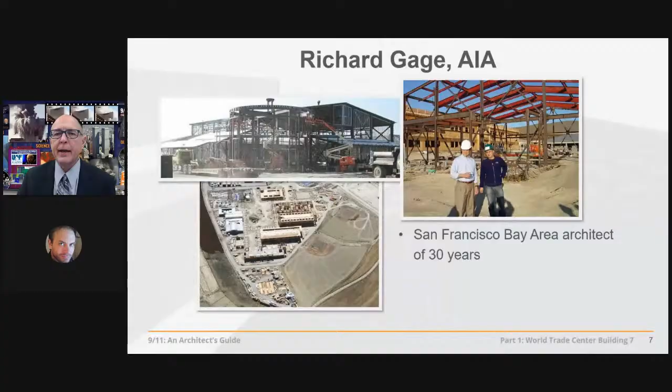Thanks, Andy. Just so people know something about my background, I was responsible at a local firm here in the San Francisco Bay Area for the construction documents for these $3 and $10 million gymnasiums, and the construction administration for this $125 million high school. And more recently, before launching full-time onto this important outreach effort, I had similar responsibilities working on this $400 million mixed-use project in Las Vegas with 6 blocks of retail, mid-rise office space, and parking structure, altogether about 1,200 tons of fireproof steel framing. I now work full-time educating architects, engineers, and others to understand what really happened at the World Trade Center using the material in these courses.

So let's get into it. Maybe some of you didn't even know that there was a third tower that collapsed on 9/11. When we travel all around the country, talking to architects and engineers at conferences, we find that more than half of them are completely unfamiliar with the third worst structural failure in modern history, Building 7.

After the Twin Towers, the worst failure here is this 47-story skyscraper that's the tallest building in most of our states, actually, but it looks dwarfed here next to the tallest buildings in the world at the time they were finished. It's part of the World Trade Center complex, Building 7, built in the 80s by Larry Silverstein, whom we'll talk about a little more later. The architect was Emery Roth and Sons, structural engineer Irwin Cantor.

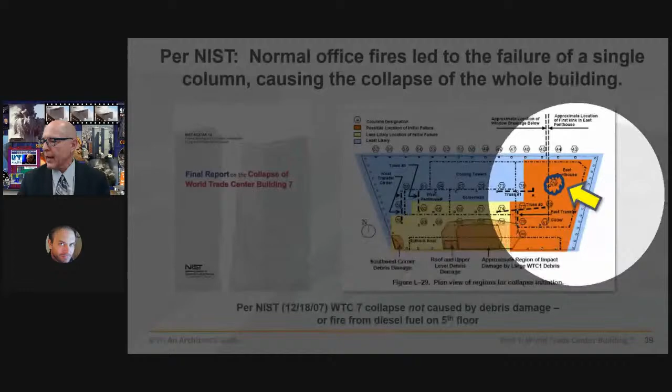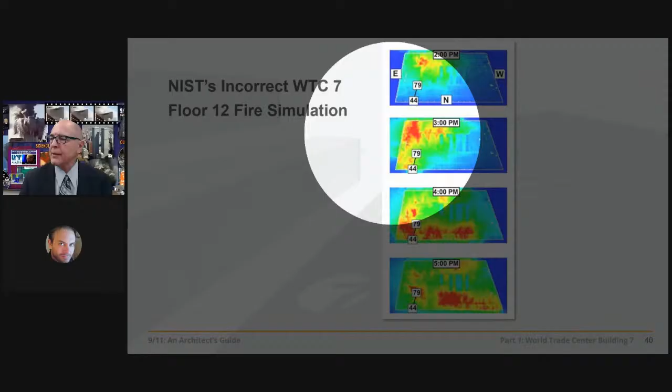NIST says the fires were concentrated at the time of collapse around column 79 under the east penthouse, because it did collapse first. So they focused their initiation of collapse theory on this column and the fires around it, with arguments claiming the fire started on the south side, which is where the North Tower was, and some of the debris hit it.

Those fires are hovering around column 79 for more than an hour until the time of collapse, that's what they're claiming. Yet they contradict themselves, because earlier in their report they say such fires did not persist in any one location for more than about 20 or 30 minutes. Indeed, that's what fire protection engineers tell us—that's all the fuel there is to burn in a modern skyscraper.

More consistent with the actual photographs, the fire has moved from the east side on the left over to the west side on the right, on the 12th and 13th floors, the floors of particular interest for the initiation of collapse by NIST.

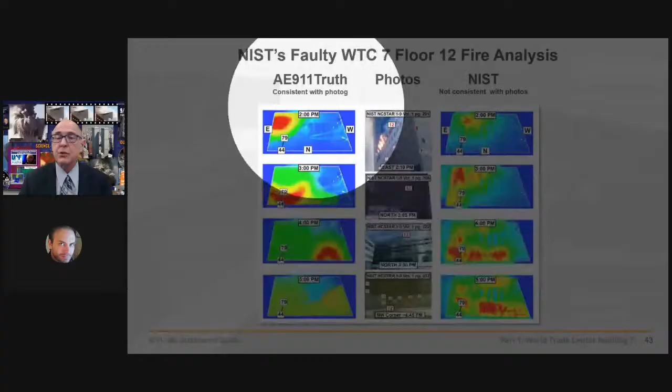So we've done our own fire progression, which does start on the south side and moves through the area, according to the photographs. That's consistent. But then by about 4 o'clock, those fires are well past column 79, more than an hour and a half before the collapse. Those fires are not around column 79 as NIST claims.

So you begin to see the problem here. NIST is exaggerating the fires for a specific intent.

Let's go further into Shyam Sunder here: our study has identified thermal expansion as a new phenomenon that can cause the collapse of a structure. For the first time, we have shown that fire can induce a progressive collapse.

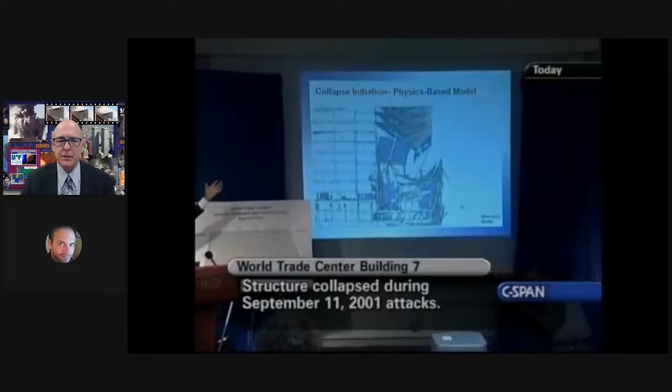So let's move on. You can see on the screen, the column at the very right is column 79, and that's the column that first buckles, causing the floors to come down, followed by a quick succession of failures of adjoining columns. So there's a very specific set of features associated with the initiation of collapse theory that NIST is putting forth, and we're going to look at those very carefully right now.

We have, first of all, long span beams over this area that they say the fire was heating up during the hour and a half prior to its collapse. We saw that was not true also.

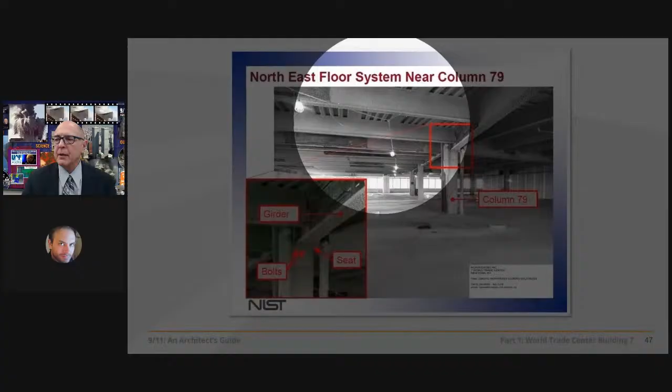But we can also see, halfway during construction, that these beams are fireproofed—that's what's going on in this area right now during construction. That provides 2 hours of fire protection on those beams. So any fire that lasted 20 or 30 minutes could not have expanded those beams through thermal expansion, the main theory that NIST put forth.

So they claim it anyway, and they suggest that the shear studs were broken. Those shear studs tie the beam to the slab up above, and they say those were broken as the beams expanded.

Well, they didn't put any of the heat into the concrete slab—they put it all into the beams in a second and a half in their computer model, forcing them to expand and then break the shear studs. But that couldn't have happened, because as we'll see, other studies show that couldn't happen at all. If you have a fire, it's not going to put all the heat into the beam in a second and a half—it's going to take time, at least 20 minutes.

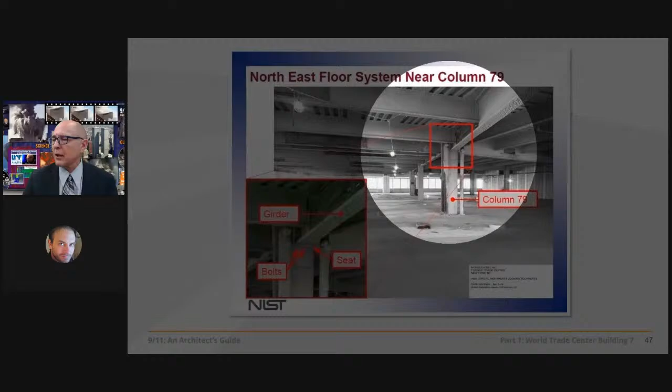So if the beam is not fireproofed—which it was—we go on and find that this girder, which is supporting these beams, was said by NIST to have been pushed off of its seat on this column.

And that's what caused floor 13 to fall on 12. Now, this girder also has shear studs. NIST says, oh no, that girder didn't have shear studs, but the shop drawings show that there's 30 shear studs on that girder. So this is extremely important. It's yet another serious omission of NIST.

They're saying, and you always put shear studs on girders if you're going to put them on beams anyway. That's what structural engineers do. But they say, oh, they weren't there.

Well, okay, let's say all this could have happened and this girder got pushed off to the right, off of this seat on this column 79. Well, that girder would have had to have been pushed 12 inches off of its seat because that's how long the seat is. But NIST says, oh no, it only had to be pushed halfway off of its seat. And then the flange, this bottom part of the I-beam, if you will, simply folded.

Well, okay. But that couldn't have happened because there's a stiffener, which you can see in the photograph here. And you can see on the shop drawings, highlighted in red, that would have kept that flange from folding. So they conveniently omit the stiffener too, to allow their hypotheses to spawn freely and suggest that the girder only had to be pushed halfway off of its seat.

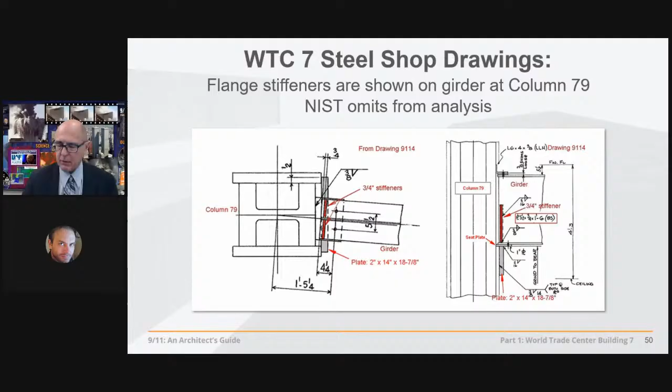Well, there's another problem here. Let's say that girder could have been pushed all the way off of its seat, as NIST claims. Then they say the 13th floor would have fallen on the 12th, and the 12th on the 11th, and the 11th on the 10th, and so on for 9 floors, until this column 79 is completely unbraced for 9 floors, at which time it then buckles because it's not braced laterally. And so that's NIST's theory, but that couldn't have happened either.

Why? Well, it's been shown that it would have, let's go back. And it's been shown by Tony Szamboti and others that it would have required 632,000 pounds of dynamic force from this floor at the point of connection at the girder to break the connections from the girders to the columns on the floor below, floor 12. But we only have 60,000 pounds, 10 times less than required to break that connection. But these values are manipulated also by NIST.

So that's the theory. And then what happens? This floor, there's a complete cascading effect, an implosion, if you will, inside the building without any telegraphing by deformation of the exterior structural steel perimeter of this form. So you would have seen massive buckling of that steel, which would have caused incredible breakage of hundreds and hundreds of stone panels on the outside, the cladding, and the windows. It would have been an incredible breaking up of the exterior because the beams on the inside of the building are very carefully welded to the beams and columns on the outside of the building.

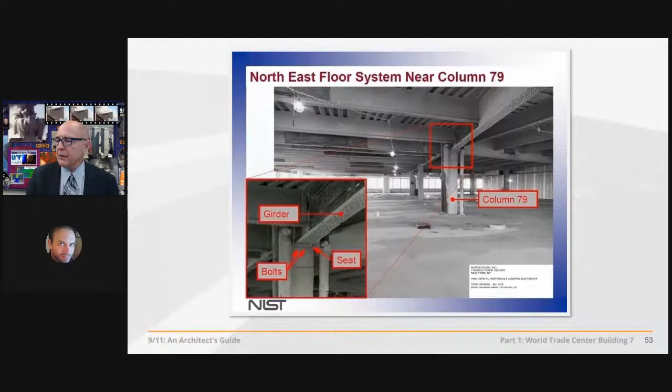Just the columns, not the beams. So none of that could have happened. So what they're going to show you here in their computer model is that the interior gave up first and then the exterior gave up, and they only have the east side of this building to show here.

Let's take a look. Here's our structural model showing the building collapsing, which matches quite well with the video of the event.

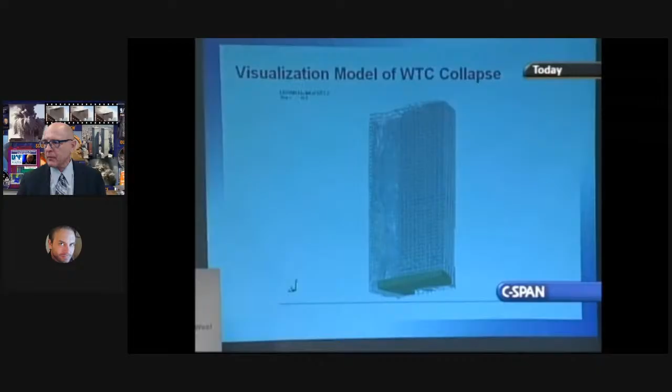What we see is something else, which we'll get to. We have the complete buckling now in their computer model afterward, but none of that is shown on the video. And it begins to tip over. So they stop it after just 2 seconds, because I guess they don't want us to see how it's tipping over. I mean, they had 7 years to come up with this theory and produce their final report. They took 7 years.

So this is why we submitted a Freedom of Information Act request to NIST. They write back saying, well, we deny, we're not going to release that computer data to you. It might jeopardize public safety. Wait a minute. Doesn't it jeopardize public safety to withhold this information from the architects and engineers who are tasked with ensuring the public safety? After all, isn't there hundreds of similarly designed buildings out there with long span beams that might expand due to normal office fires?

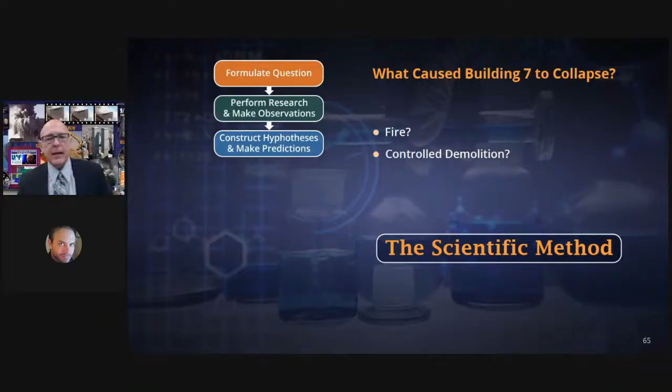So we test with experiments those hypotheses. We analyze the results, we draw conclusions. If the hypothesis is corroborated, we report the results in an open, transparent manner.

We don't hide the computer input data and refuse to give it to the architects and engineers who are tasked with ensuring public safety, right? We want all to build on the body of work that we do. That's the core, the effect of the scientific method. We rely, we have faith in the work done by others because it was done openly, transparently.

If the hypothesis is not corroborated, what do we do? We go back, try again. We construct a new hypothesis, which is what we're doing today. And we continue until we have a hypothesis that is corroborated by the research.

So let's do some background research. How are buildings destroyed? Fire is certainly a destructive force, but never have we lost a skyscraper to it. In a wood frame building it's a chaotic, natural, organic event. The building wouldn't fall straight down through the path of greatest resistance, the tons of unburnt structure below. It might fall over if it collapses at all.

NIST acknowledges that we only have fires burning for 20 or 30 minutes or so. That's all the fuel there is to burn in modern skyscrapers, desks and chairs and so forth. That's why we build our high rises out of non-combustible materials and fireproof them with 2 to 3 hours of fire protection.

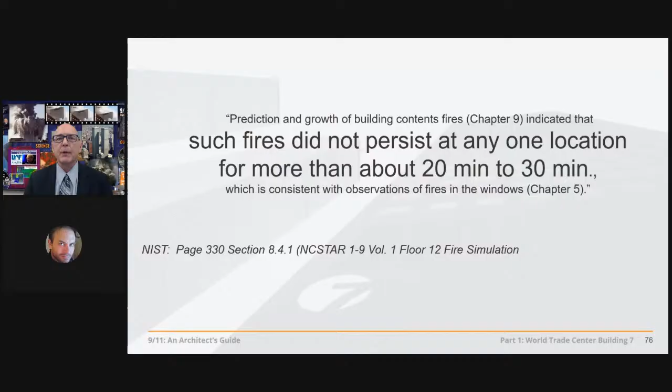So let's look and see how we might expect a high-rise to behave in a fire. Like this example, a key, critical example, the largest test of its kind: 8 stories built out of steel. Some of it is fireproofed, and some of it is not. They wanted to know what happens if they reach a 2,000-degree fire with an incredible amount of fuel, then set it on fire and see what happens. Let's take a look.

This was the largest test of its kind ever conducted. It showed how unprotected steel can be distorted even by a normal office fire. But as is typical in steel buildings, the structural beams only slowly and progressively warped and sagged. There was no chance of a sudden collapse.

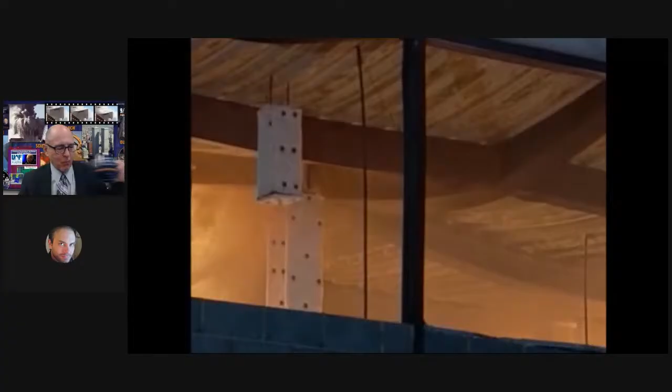In over 20 years, I have not seen, until recently, a protected steel structure that has collapsed in a fire. Jonathan Barnett, fire protection engineer of the FEMA team, is referring here to 9/11, when we had not 2, but 3 protected steel structures collapse primarily due to fire. We'll get to the Twin Towers in part 2 of this 3-part series next week.

But look, we don't have failure of the connections in these incredibly hot fires. And yet NIST caused, in their computer model, 400 steel connections to fail every second in order to get their computer model to fail. It's nothing like the precedent set by experiment. Experiment is the arbiter of competing hypotheses.

It's inherently stable behavior, the executive summary cites, due to the highly redundant nature of the structural steel form. Well, let's look at some high-rises that have had incredible fires on them.

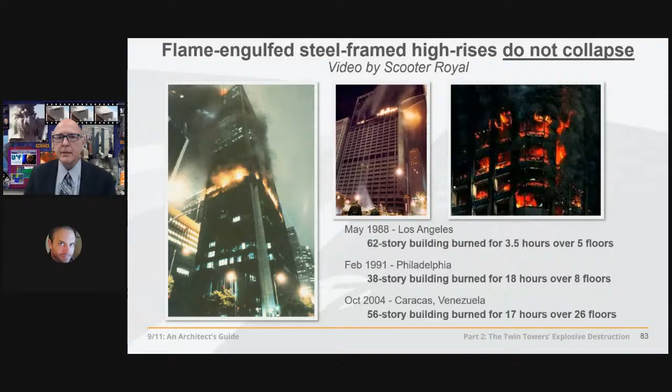Let's see what happens. May 4th, 1988: the First Interstate Bank, a 62-story building in Los Angeles, California, suffered a 3.5-hour fire which burned across 5 floors and caused an estimated $200 million of damage. It did not collapse. February 23rd, 1991: the One Meridian Plaza, a 38-story building in Philadelphia, suffered an 18-hour fire which burned across 8 floors.

The fire caused an estimated $100 million worth of damage and 3 firefighters died fighting it. It was later described by officials as the most significant fire of the century.

It did not collapse. October 17, 2004: the East Tower of the Park Central complex in Caracas, Venezuela, suffered a 17-hour fire which spread across 26 of its 56 floors. It did not collapse. August 18, 2007: a fire broke out on the 17th floor of the Deutsche Bank building in New York, a building undergoing deconstruction after being heavily damaged by debris from the South Tower on 9/11.

Originally 41 stories in height, it had been reduced to 26 at the time of the fire, which lasted 7 hours and affected a total of 10 floors. 2 firefighters died of smoke inhalation. It did not collapse.

On 9/11 itself, 5 World Trade Center, a 9-story building east of the North Tower, was engulfed in flames after sustaining heavy damage from falling debris. A number of partial collapses occurred, but the overall structure remained standing.

February 9, 2009, the Mandarin Oriental Hotel in Beijing was completely engulfed in flames for more than 3 hours during the Lunar New Year celebrations. The fire affected all 44 floors, igniting fireworks as it burned. 1 firefighter died fighting it. It did not collapse.

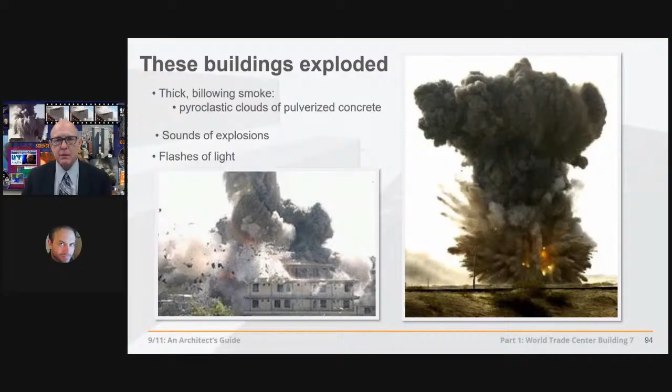And we'll be looking for explosions evidence today in Building 7. But here's how explosives can be very finely tuned to bring down high rises. It's called controlled demolition. There's a handful of companies in the US that are capable of doing this. That's all. It's a very scientific process.

You have to have intimate knowledge of the structure. They place thousands of shaped cutter charges throughout the columns and beams in the buildings, specifically designed to sever those columns from those beams, so that the building comes down with a set of very characteristic features that can be defined. Let's take a look at those.

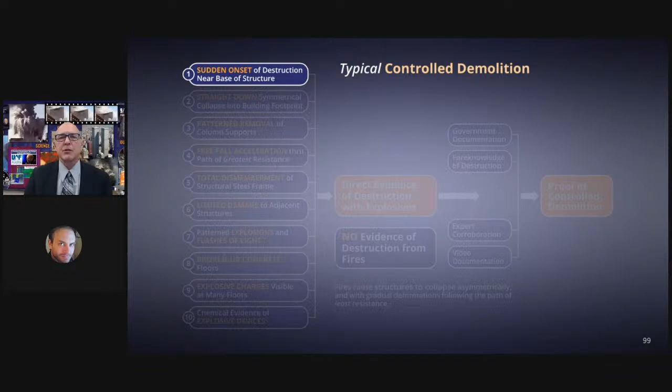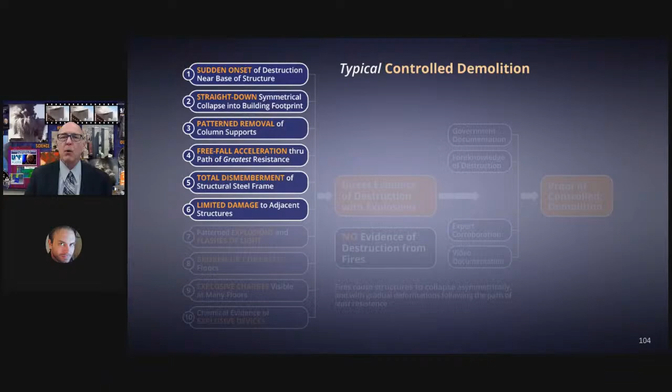We have a sudden onset of destruction, usually at the base of the structure, if that's where they want to start. We have a straight down symmetrical collapse, usually, if that's what they want to accomplish, into the building's footprint, because there's a patterned removal of column supports that instantly removes that structure, resulting in a free fall or near free fall acceleration straight down through the path of what was the greatest resistance, and the total dismemberment of the structural steel frame. So it's broken up, ready for loading and shipment, with limited damage to adjacent structures.

Feature number 6, that's one of the goals of controlled demolition. And 7, there's patterned explosions heard by witnesses, flashes of light seen by them. We have broken up concrete floors. You don't want to have to go back in there and jackhammer those floors. Let the explosives do all that work. And 9, explosive charges visible at many floors, isolated explosive ejections called squibs in the controlled demolition industry. This is all chemical evidence of explosive devices.

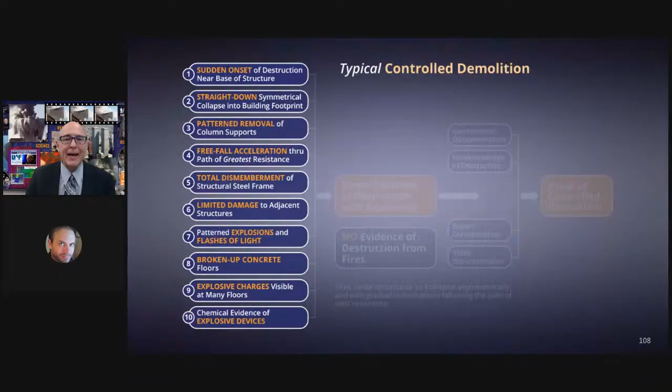Of course, we'd be looking also for chemical evidence left behind in the aftermath, right? So what this all is, is direct evidence of destruction with explosives. It's not evidence of fire. Fire can't create any one of these features, let alone all 10 of them. So if we have all 10 of them, we're gosh darn sure that we have a controlled demolition, right? There is no doubt. That's what we're looking at today.

Fires cause structures to collapse asymmetrically with gradual deformation following the path of least resistance, with additional circumstantial corroborative evidence such as government documentation, right? You have to get approvals. You don't just bring down a high-rise building by controlled demolition in an afternoon, for instance. It takes months of approvals and setting up loading and so forth.

So there's foreknowledge by people. They know in advance that the building is going to come down. It's not a surprise, as Building 7 was to most people who were not aware of the story set forth about its impending collapse. We'll get into that.

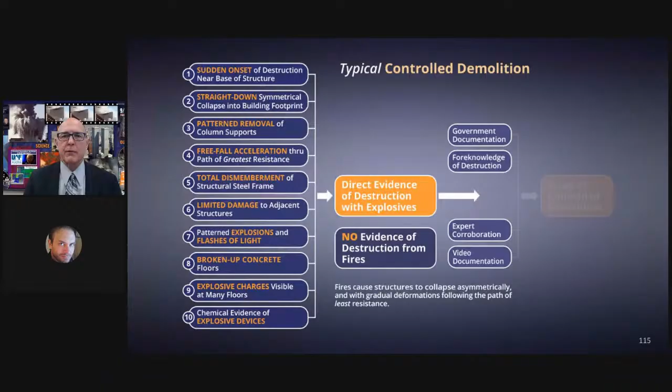Experts agree, at least, that this is a controlled demolition, or that a building was brought down by controlled demolition, at least those experts who don't have financial or political obligations that might sway their objective opinion in the matter. And video documentation, of course, can all be proof of controlled demolition.

So with that model of proof in mind, let's apply it to Building 7 and see, first, do we have a sudden onset of destruction near the base of the structure? Here's Dan Rather observing his view of Building 7 collapse. What you're seeing are live shots.

Now we're going to show you a videotape of the collapse itself. Describe that. Now we go to videotape of the collapse of this building.

It's amazing. Incredible, pick your word. For the third time today, it's reminiscent of those pictures we've all seen too much on television before, when a building was deliberately destroyed by well-placed dynamite to knock it down. Deliberately destroyed by well-placed dynamite to knock it down? Well, that's very helpful, Dan. He's never said that after 9/11.

And we've never seen, with two exceptions, the mainstream media show this, the third worst structural failure in modern history. It's just been wiped under the rug, such that not even architects and engineers know about it, most of them, because in the case of the American Institute of Architects, which has 90,000 members, of which I'm one, we did not receive one bulletin on the collapse of this building. And it should have been the most studied structural failure, perhaps outside the Twin Towers.

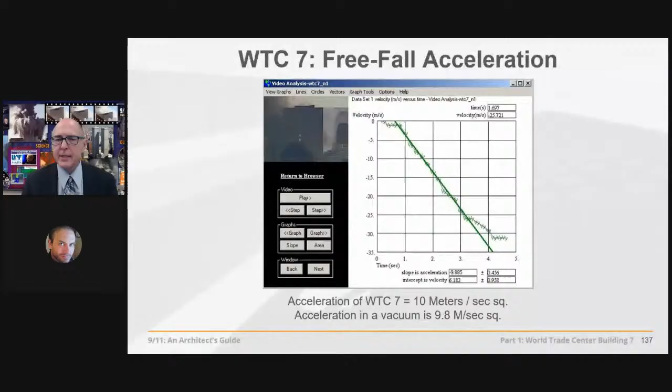It's a question for you. Feature number 4: is there a free fall acceleration? What does that mean anyway? Let's go to physics teacher David Chandler, who explains this for us.

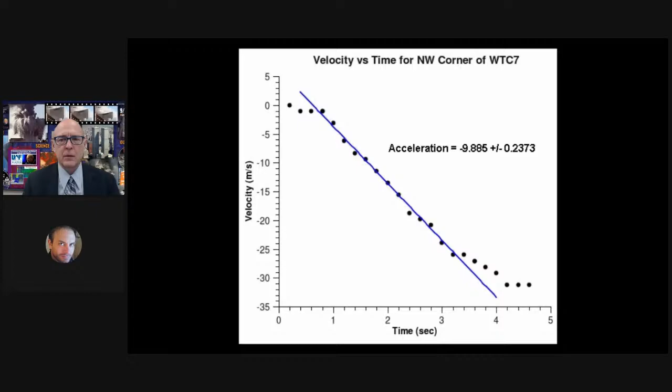Just by watching it, anybody can see that Building 7 fell close to free fall. To measure it, I used software to track the corner of the building and compute a graph of downward velocity as a function of time. The graph had a long, straight section indicating constant acceleration. Measuring the slope, I found the acceleration to be within 1% of the acceleration of gravity for the first 2.5 seconds. In other words, the building fell through its own structure with zero resistance.

Zero resistance? Let's go to a structural engineer and have him explain that to us. This building had 40,000 tons of structural steel in its structural system, and that is intended to keep it from going anywhere. NIST is telling us that the building below it ceased to exist for the first few seconds of the collapse of the building. Well, things in physics just don't cease to exist and cease to resist the forces that are on them.

The building didn't disappear, so the building can't fall for 100 feet at free fall speed. That's impossible. That's a violation of the fundamental law of physics that says that for every action, there's an equal and opposite reaction.

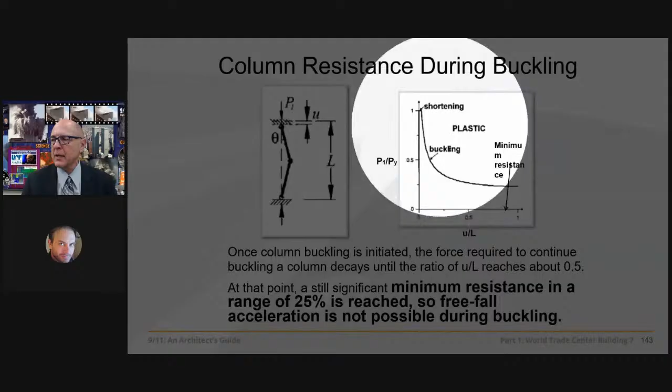This is a column. When a column breaks or buckles, it continues to have resistance. There's resistance up to 25% of typical columns. It never goes to zero. It continues to resist. So we would never have had the 2.25 seconds of free fall that David Chandler forced NIST to acknowledge if any of those columns weren't completely removed.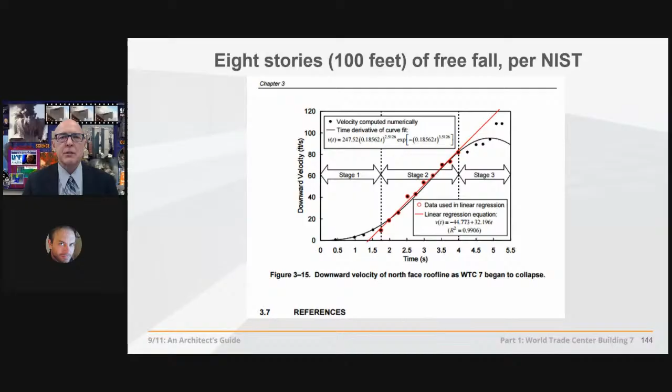We would not have had free fall. Free fall is a bowling ball falling out of the sky. So here we have free fall. Where did all those columns go? NIST acknowledges the free fall in their final report, but they don't acknowledge the implications of that free fall, which is that those columns just all of a sudden disappeared. Well, how did that happen?

Well, let's look at them. Feature number 5: are they totally dismembered? Yeah. A 47-story skyscraper with moment-resisting columns and beams. They're welded to each other very rigidly for a substantial portion of this moment-resisting steel frame structure. We should have seen a 20-story tall pile

composed of mostly air. But here we have, it fails like a house of cards. All the columns and beams have been severed one from another. Remember, buildings that fall naturally, you don't have it falling like a house of cards.

The building is recognizable as a building at the base. Is there limited damage to adjacent structures? Yeah, there's a little bit of damage to the Verizon office building and the post office, but the center of the building is in the center of the property, the remaining building.

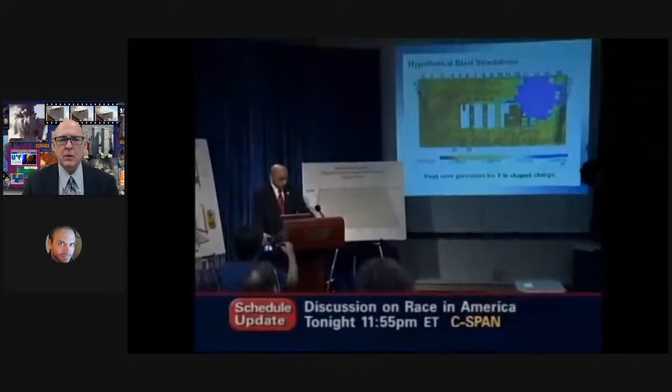Is there sounds of explosions heard by witnesses? Well, let's first go to NIST's Shyam Sunder. We did not find any evidence that explosives were used in the collapse of Building 7. We ran down detailed computer simulations of blast scenarios. This size blast would have produced an incredibly loud sound that was not recorded on videos of the collapse nor reported by witnesses.

We will show you why that incredibly loud sound might have been a whole lot less, and we will show you, nevertheless, witnesses of explosions like this one. We were... the collapse of the building actually, because it was on fire. The bottom floors of the building were on fire, and we heard this sound that sounded like a clap of thunder. Turned around, we were shocked to see that the building, it looked like there was a shock wave ripping through the building, and the windows all busted out, and it was horrifying. And then about a second later, the bottom floor... a shock wave ripping through the building, the windows busting out, the building crashing down.

How about this witness, Kevin McPadden, former Air Force medic, who was on site at Building 7. And then it was like another 2-3 seconds, you heard explosions, like boom. It's like a distinct sound. It's not like when in compression, like boom, boom, boom, boom, boom, like floors that were dropping and collapsing. This was boom, and you felt a rumble in the ground, like almost like you wanted to grab onto something. That, to me, I knew that was an explosion. There was no doubt in my mind.

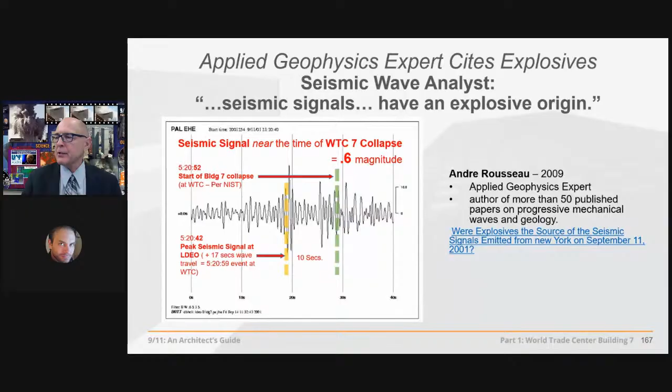It's picking up the actual collapse of the building - 10 seconds, it's picking up a signal that's occurring 10 seconds prior to the actual collapse of the building. Well, what could be causing that force?

Well, we go to Andre Rousseau, 2009, an applied geophysics expert, author of more than 50 published papers on progressive mechanical waves and geology. He says the bell-like form points to an impulsive source of energy, not percussion on the ground due to the falling of debris.

Like the witnesses heard an explosion prior to the collapse of that building. Seismic waves are only created by brief impulses, low frequencies. These undeniably have an explosive origin.

So we go to another expert. Actually, in this case, NIST helps us quite a bit, because we're looking for evidence of pyroclastic-like clouds, heat. And the National Fire Protection Association Guide 921 was assisted by NIST in producing the Guide for Fire and Explosion Investigations. So NIST should have been all over the evidence of heat here, because they themselves tell us: look for large volumes of gas and the large amount of heat released.

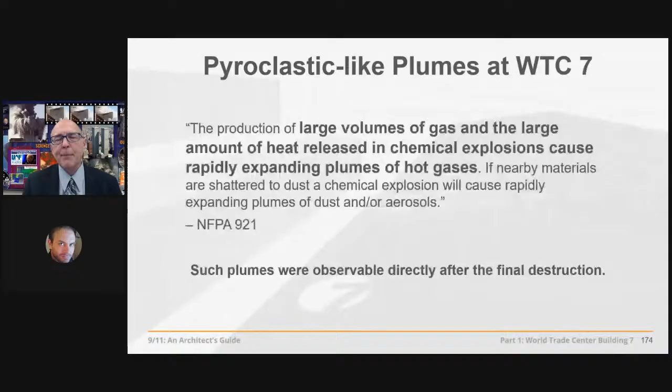In chemical explosions caused by causing rapidly expanding plumes of very hot gases, like we see racing away in every direction from Building 7, at 35 miles an hour, expansive pyroclastic-like clouds of expanding, extremely hot gases in cauliflower-shaped forms with a solid edge, produced by an incredible amount of heat. Not that heat, but something more on the order of that.

So let's look for it. Well, we find it in the infrared sensitive cameras aboard the NASA air flights, who were thermal mapping the surface temperatures, at which in World Trade Center 7, after the collapse, we have 1,340 degree temperatures, hotter than most all office fires.

1,340 Fahrenheit on the surface. Well, wait a minute. Here's the surface, and there's no fire on the surface. So how do we have temperatures mapped on the surface that are hotter than most office fires ever get to? Because something deep down in the pile is a lot hotter than that, radiating up to the pile and cooling down to 1,340 degrees Fahrenheit by the time it gets there.

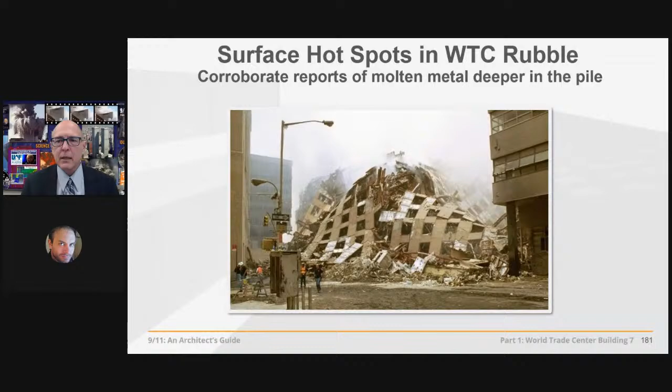Let's look for additional evidence. Abolhassan Astaneh-Asl: I saw melting of girders in World Trade Center. Wait a minute, girders don't melt in office fires. And yet here's the girder from the WTC 7, a piece of steel that he's documenting being melted.

So how did it happen? What source of heat is even possible to do that? How about FEMA author Jonathan Barnett, fire protection engineer: steel members in the debris pile appear to have been partly evaporated in extraordinarily high temperatures. Well, wait, we're talking 4,000 degree Fahrenheit temperatures to melt, evaporate steel. So how did that happen?

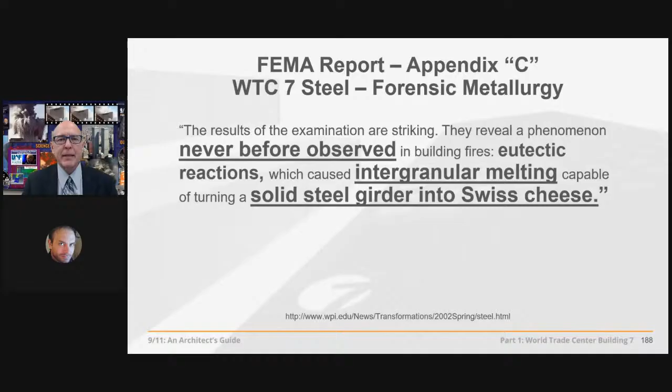Well, it's documented also in FEMA, the FEMA report in Appendix C. It's the Building Performance Assessment Report that came out in May of 2002. It's a metallurgical examination of the Building 7 steel in which they document never before observed eutectic reactions, intergranular melting, capable of turning a solid steel girder into Swiss cheese.

Like you see here, this doesn't happen in normal office fires. Rapid oxidation, sulfidation, liquid iron, and sulfur formed during this hot corrosion attack on the steel. Wait a minute, how does this even happen?

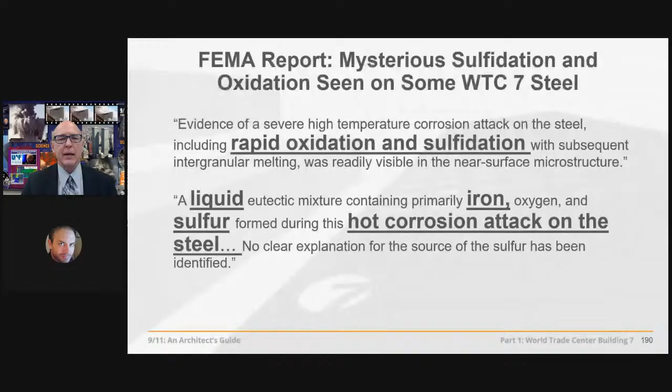This is so pertinent that the New York Times calls it the deepest mystery uncovered in the investigation. And yet it was completely eliminated from NIST's draft and final reports after they took over the investigation from FEMA in 2002. Just swept under the rug.

And further, they claim, gosh, we couldn't test, there's no steel from Building 7, no steel recovered. Again and again and again, they claim no tests could be done.

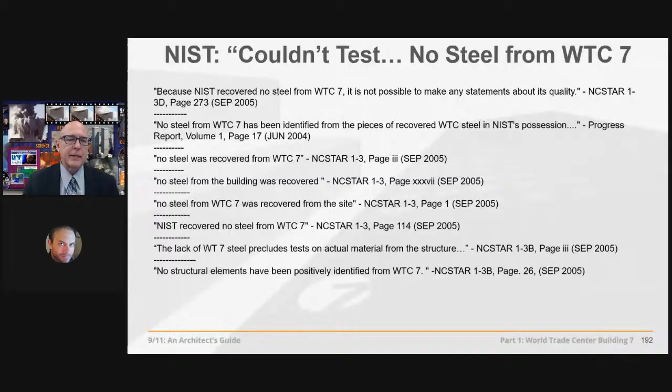And yet, that piece of steel was provided by who? John Gross, the co-project leader of the NIST report, who's found here discovering the very piece, the ends of this evaporated beam from World Trade Center 7, provided to FEMA for their metallurgical testing. And yet his shadow is all over the evidence, and yet he's denying it even exists.

So maybe the fires are 1,200 degrees at the hottest, probably. Now, hydrocarbons, buildings, and jet fuel for that matter, even though there's no jet fuel in Building 7, only produce 600 to 1,400 degree Fahrenheit temperatures. That's like the hottest office fires typically.

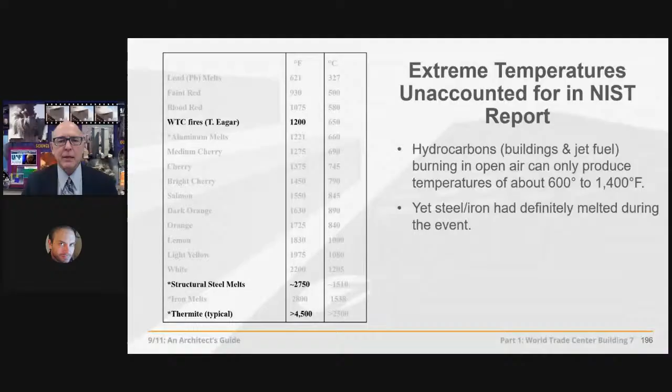Yet steel had definitely melted. We can see it here, pouring out of the material held in the jaws of this crab claw excavator. We're exceeding 2,500 degrees. You can tell the temperature of molten metals by their color. We even have white hot here. So how do we get temperatures over 2,500 degrees, capable of melting steel which occurs at 2,800 degrees actually, from normal office fires?

The official narrative: what caused the steel and iron to melt? Let's see if there's any evidence. Maybe thermite could have done that. Well, what is thermite anyway? An incendiary used by the military, thermite is a compound of iron oxide and aluminum, which when ignited sustains an extreme heat reaction, creating molten iron. In just 2 seconds, thermite can reach temperatures over 4,500 degrees Fahrenheit, quite enough to liquefy steel.

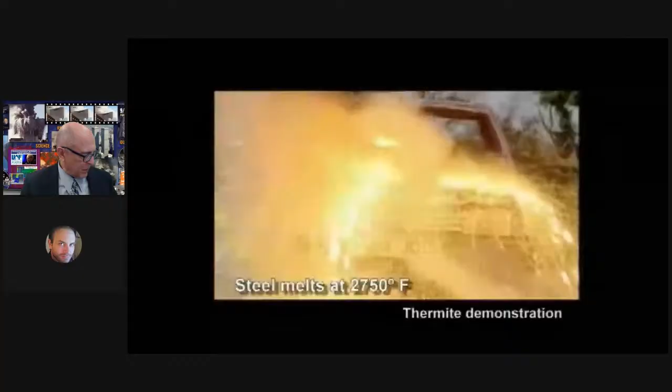We know that open-air fires cannot burn hot enough to melt steel, but metal had melted at the base of the towers. Appendix C of the FEMA report describes sulfur residues on the World Trade Center steel. The New York Times called this the deepest mystery of all. Sulfur slightly lowers the melting point of iron, and iron oxide and iron sulfide had formed on the surface of the structural steel. Sulfur used with thermite is called thermate, producing even faster results.

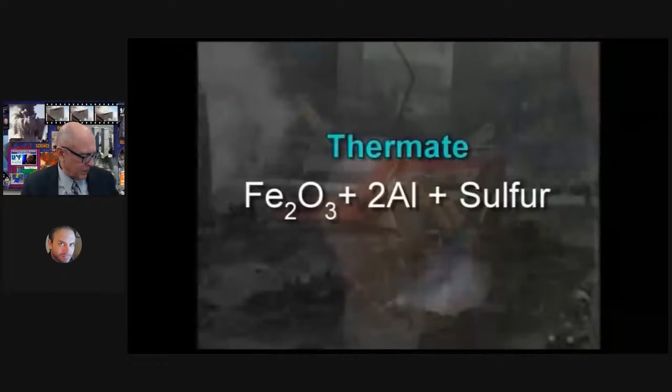Sorry about the flickering on that video, I'll fix that. But maybe we're getting somewhere here now, because if thermite were used, it would explain the presence of extreme heat, 2,800 degree heat to 4,000, because it releases 4,000 degree heat. That's how incendiaries work, by destruction by means of extreme heat. It would also explain the presence of elemental iron, which we're going to be showing you presently. And it would also explain—because we haven't used iron in our skyscrapers for columns and beams in 100 years—

this is elemental iron, not steel, not melted steel that we're talking about here. It would also explain the presence of sulfur, because sulfur is added to thermite to become thermate, much more effective at cutting through steel.

NFPA Guide 921 also says to look for unusual residues that could arise from thermite or other pyrotechnic materials. NIST said they found no corroborating evidence to suggest that explosives were used. But a year later, they finally admit in writing that NIST did not test for the presence of explosive residue. You can't find what you won't test for, what you won't look for.

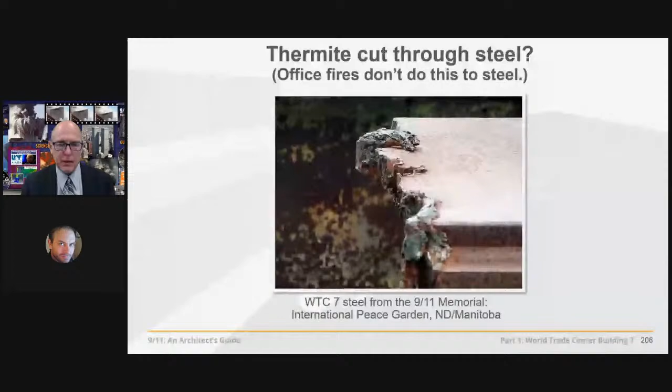He gets curious and performs X-ray energy dispersive spectroscopy, finding in the beam the elements of iron oxide, elemental iron and aluminum, the key ingredients of thermite, along with manganese and sulfur. To him, that's a sure sign that thermite was used here.

He turns to the actual studies the U.S. Geological Survey did on the powder surrounding the World Trade Center for 3 square miles, this blanket of dust. He finds that they discovered billions of these previously molten iron microspheres. They're almost invisible to the human eye, some of them a 16th of an inch large, but they're in all the World Trade Center dust samples, evenly distributed, more in samples closer to the towers, less in samples further away, but present in all of them.

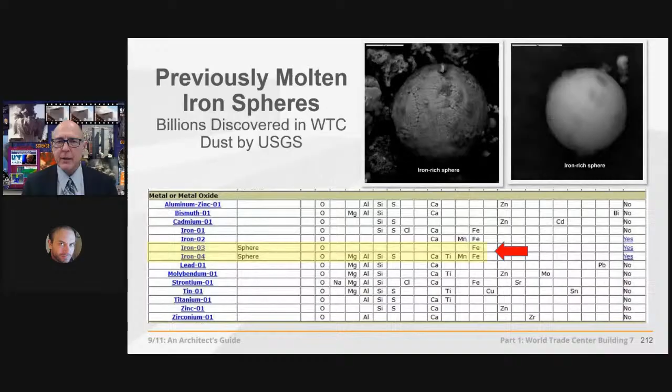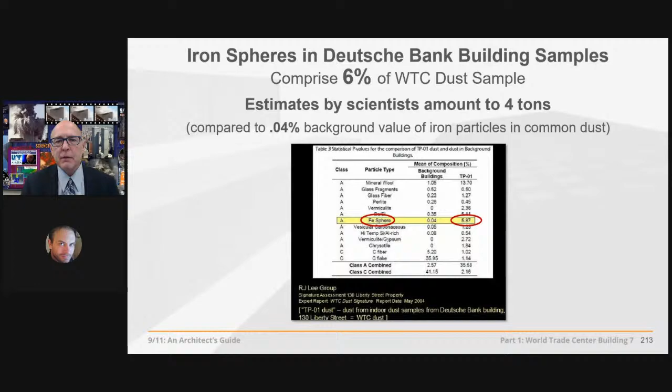This is very curious because they're elemental iron. How did elemental iron microspheres get into all the World Trade Center dust samples? They don't know. They don't even speculate. In fact, up to 6% of some of these dust samples are composed of these iron microspheres, amounting to about 4 tons by extrapolation — 150 times the amount of background iron you'd find in common dust, like you see on the left here.

But these are spheres, not just odd-shaped particles. R.J. Lee Group, an environmental engineering group studying the dust samples, has also found these in all of their samples, and they confirm and conclude that these were formed during the event — not before, say by welders constructing the site, and not afterward by iron workers deconstructing it, but during the event itself.

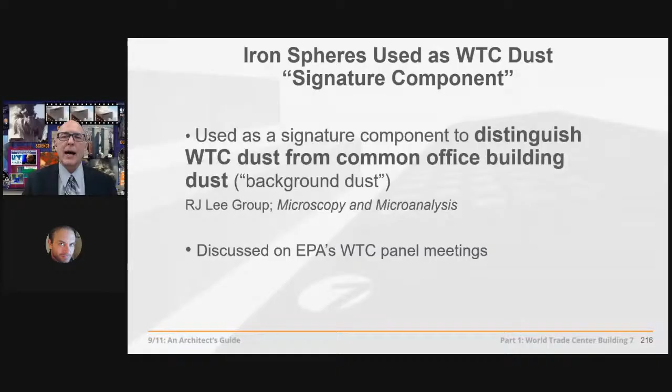How could they be formed during the event? We know it takes 2,800 degrees to melt iron or steel. There are so many of these spheres that the EPA says they're used to distinguish World Trade Center dust from common office building dust. In other words, it's not even World Trade Center dust unless it contains all these previously molten iron microspheres. So how do they form?

Let's look at this thermite experiment. It's not too difficult — you light thermite, it creates 2,800 degree temperatures and melts the iron oxide as the oxygen moves from the iron to the aluminum, off-gassing as aluminum ash and leaving behind molten iron microspheres.

Why spheres? Well, aerosolized liquids form themselves due to surface tension into spherical droplets. In the case of molten iron, they cool and fall, damaging cars — specifically the tops of these cars. What other element in the official narrative of this high heat event can explain the toasting of the tops of these cars?

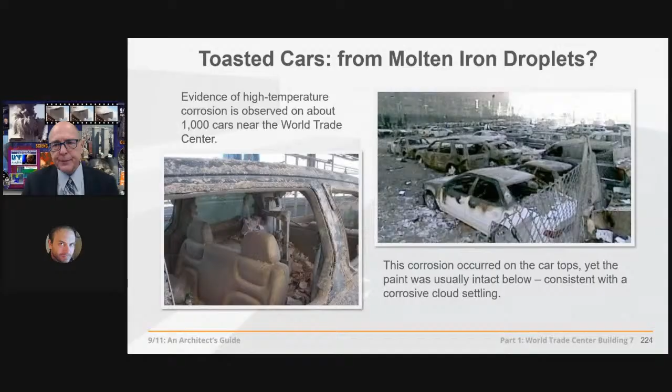Cutting cleanly through the structural steel. Well, you don't have to do it in your backyard — you can use very sophisticated thermite shaped cutter charges, patented prior to 9/11, that issue streams of molten iron in hundreds of milliseconds, cutting through much thicker sections of structural steel than RDX, C4, or other high energy explosives can. So why else might you not use those?

Well, they provide very loud bangs and very bright flashes. So in a deceptive controlled demolition, you might want to avoid those obvious audio and visual signatures and try something else, like molten iron.

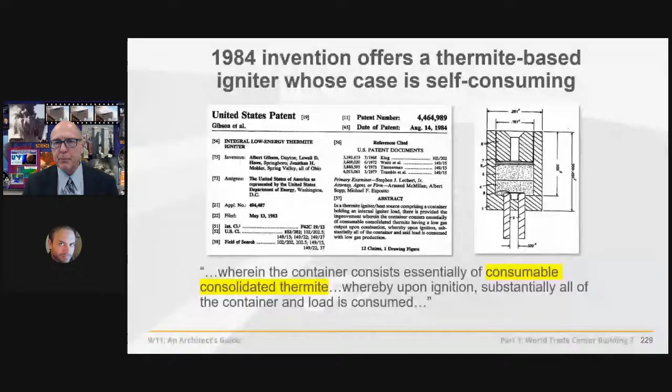And in fact, there are similar devices whose casings themselves are made out of consolidated, consumable thermite. Nothing left in the debris except pools of molten iron, which we'll discover were pulled out of the World Trade Center buildings by the ton after they cool. They're called meteorites. We'll get to that in two weeks from today in this three-part series, 9/11 An Architect's Guide.

But first, let's talk about what else was found in the World Trade Center dust. In this case, a team of eight scientists led by Niels Harrit in Copenhagen have samples brought to them, seven altogether, and four were ultimately put in this peer-reviewed paper. One of them from Janette MacKinlay, whose apartment windows were blown in by the incredible explosive force of the South Tower

demolition, and we'll get to that next week.

Her apartment was filled with this dust. She was an artist. She collected it, and she paid for that decision with her life, very tragically succumbing to brain cancer a few years later. But one of these samples is hers.

They get real curious about these because they thought they were paint at first, but examining them carefully, they're attracted by a magnet. So they have iron in them. Iron content is one of the key components of thermite.

And so they zoom into the red layer and do X-ray energy dispersive spectroscopy on the red layer, finding yet again, in this case, unignited residue of thermite, including iron oxide and aluminum, with silica, carbon, and oxygen. We'll come back to that.

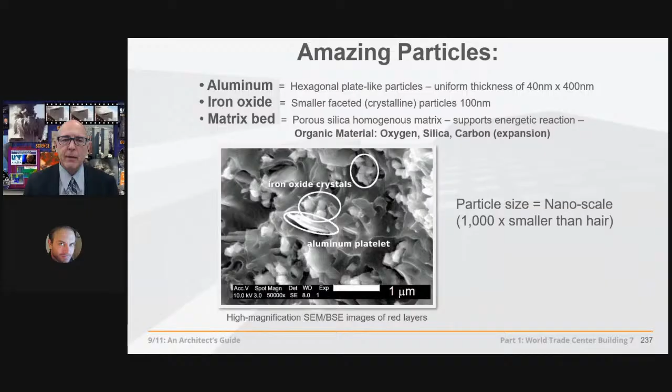So here you have incendiary materials mixed with organic materials at 420 centigrade, 750 or so Fahrenheit. They ignite in a heater, a differential scanning calorimeter. What happens when they ignite? Well, first of all, the ignition shows that this is exothermic materials. There's not paint.

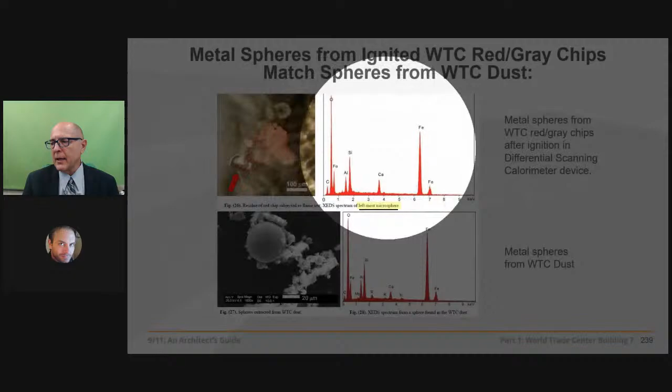And when they ignite, they produce, there we go, they produce spheres, iron spheres, molten iron spheres with the same chemical signature as the molten iron spheres produced and are found in the World Trade Center dust.

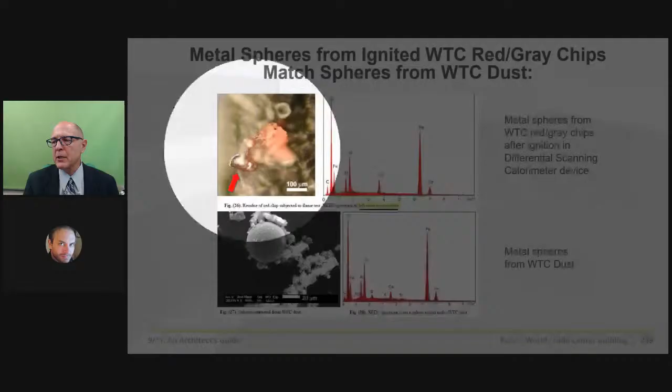So we know where these red gray chips came from. We know where these microspheres came from. They came from these red gray chips. So you see, this is a set of repeatable, self-corroborating experimental evidence that can be used in a court of law to bring these perpetrators, the real perpetrators, to justice.

Perpetrators who had access to the most sophisticated nanothermites. We're not talking about a cave in Afghanistan here, as if we didn't know where these came from. The spheres are found attached to partially ignited red gray chips, as you see here and here.

When these components are reduced to the nano scale, they react very differently. The surface area increases exponentially. So the chemical reaction time is decreased exponentially. So you've engineered an incendiary to become an explosive. It's not made in your garage. This is made only in the most advanced defense contracting laboratories.

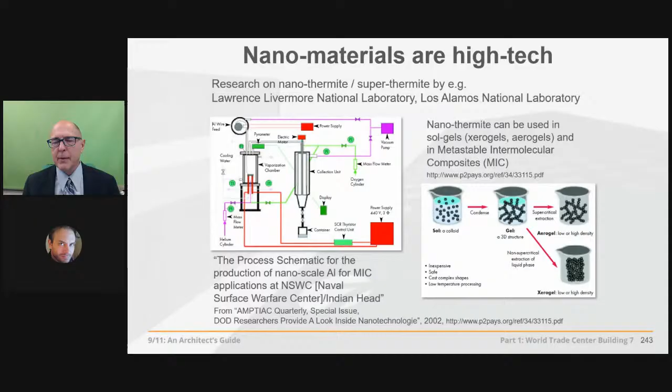So we have a source of inquiry here that can be used by real criminal investigators and enterprising journalists who want to really know and speak and publish the truth about what happened here at the World Trade Center. You can start with this peer-reviewed paper in the Bentham Open Chemical Physics Journal, which concludes that the red layer of these red-gray chips is unreacted thermitic material incorporating nanotechnology.

It's a highly energetic pyrotechnic or explosive material. You can download this and send it around. It's been available for almost 10 years now.

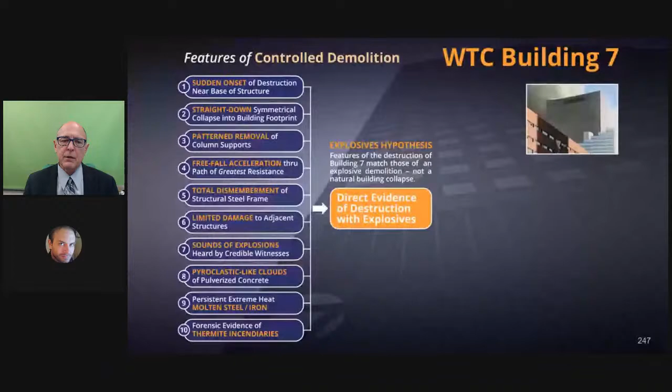So what we've shown today is the first is 10 key characteristic features of explosive or incendiary demolition. Direct evidence. Fire doesn't have these features. This is not evidence of destruction by fire. It doesn't produce any of them, let alone all of these features.

There's tons of heat sink there. It distributes that heat.

So we don't have the steel ever getting to its 1200 degree critical temperature, at which it loses half of its strength and begins to sag. We don't want that to happen, because that can happen in very hot fires.

So we put cementitious fireproofing on these beams: 2 hours on the beams, 3 hours on the columns, keeping that building from ever getting to a point where it can fail or expand thermally, per NIST's initiation of collapse theory. This is 4 to 6 times more time to protect the building than a fire has to burn in any one area.

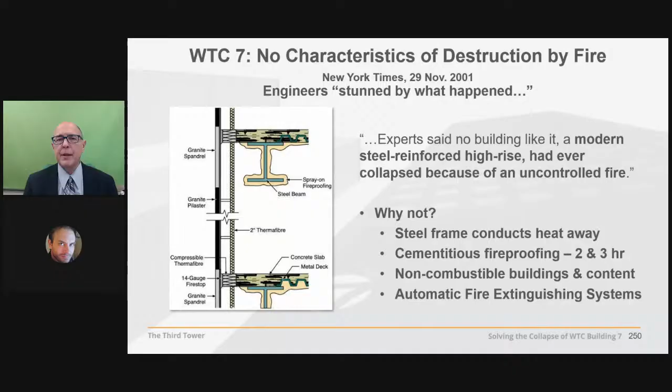In the case of Building 7, the sprinklers were said to have been compromised by the collapse of the Twin Towers, the sprinkler mains.

So let's look into these reports just a little bit. There were official investigations starting, as we mentioned, in 2002 with FEMA. They had $600,000 worth of funding, which is minuscule compared to the space shuttle disaster or the effort to determine the source of the stains on Monica Lewinsky's dress.

But the New York Times cites that they had bureaucratic restrictions and couldn't get access to the site, couldn't get access to the blueprints of the building, couldn't get access to the public to ask for photographs and so forth. So this is really quite a compromise to the efforts here.

But we saw what they produced in the way of the metallurgical examination in Appendix C of the Building Performance Assessment Report, which is very valuable, which NIST threw out in 2002 when they took over. And they came up with their own theory, again, that fire caused the collapse of the building.

They admit in 2006, truthfully, we've had trouble getting a handle on Building 7. Yeah, we agree—they completely threw out this Appendix C report. And FEMA cites that further research, investigation, and analysis are needed to resolve this issue.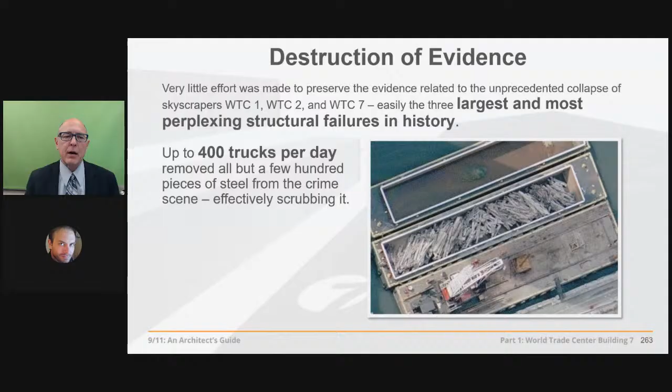Unfortunately, though, for those hoping to resolve the issue, we have the complete destruction of evidence in a crime scene—easily the largest and most perplexing structural failures in history. We have 400 truckloads a day taking this steel out of the Twin Towers, putting it on barges, and shipping it to China for recycling.

This is the illegal destruction of evidence in a crime scene, prompting Bill Manning, editor-in-chief of Fire Engineering magazine, to cite that crucial evidence that can answer many questions is on the slow boat to China, showing an astounding ignorance of government officials to the value of a thorough scientific investigation. The destruction and removal of evidence must stop immediately.

But of course, it wasn't. And so we have so many experts who were not tied to financial or political obligations that might sway their objective opinion, like in this case, Danny Jowenko.

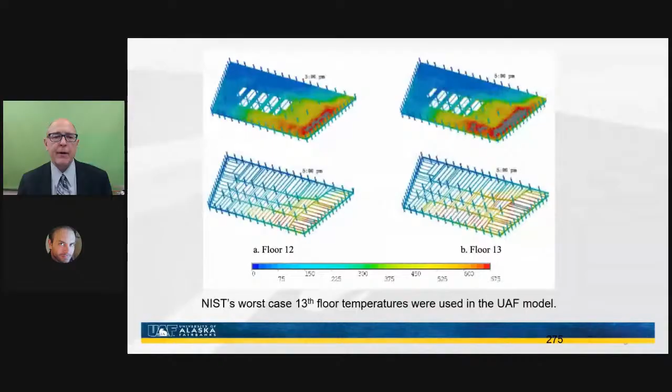And what does he say? Well, there's a problem here: no other tall steel frame building has ever failed due to fire. This is the first one.

We have to know what's going on here. We have to ensure the public safety, that the failure mechanism must be understood. So he examines the approach here. The science is to examine the response to the fire loads, rule out scenarios that would not cause the collapse,

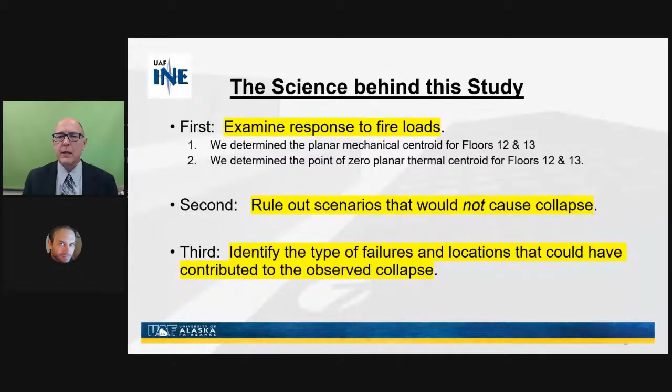and identify those types of failures and locations that could have contributed to the observed collapse. So he uses the same input values as NIST does, for better or worse. In other words, a very conservative test using NIST's presumptions, many of which we've proven already are false, but we want to compare apples to apples here.

So he has 3 approaches. One, simulate the local structural response to fire loading for floors 13 and below, because that's what NIST concentrated on. Two, examine the NIST collapse initiation hypothesis. And three, simulate numerous failure scenarios that could lead to the total collapse as observed in the videos of the collapse.

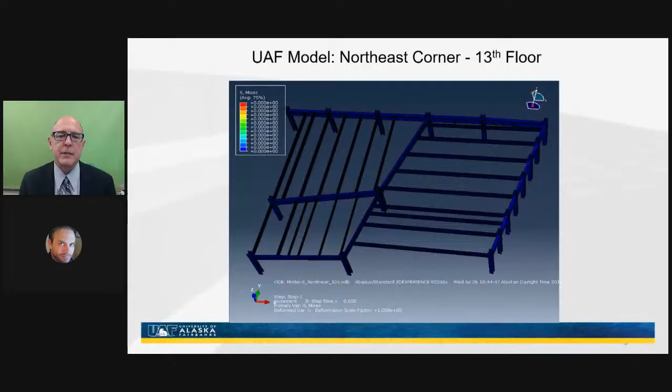So he puts all of the data from the building structure into AutoCAD and then models it on Abaqus software, and then models it also on another software called SAP 2000, focusing on the initiation of collapse theory to see if it could have ever happened here on column 79 with these expanding beams.

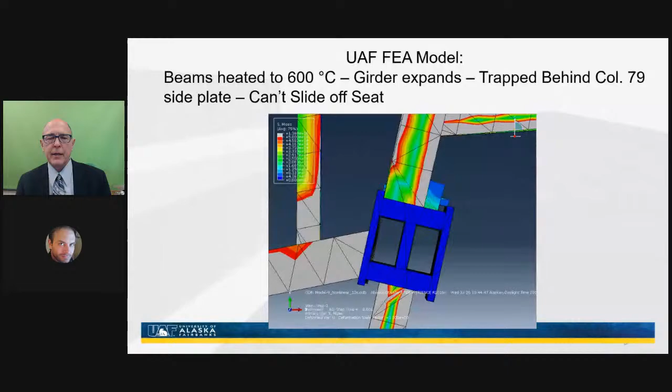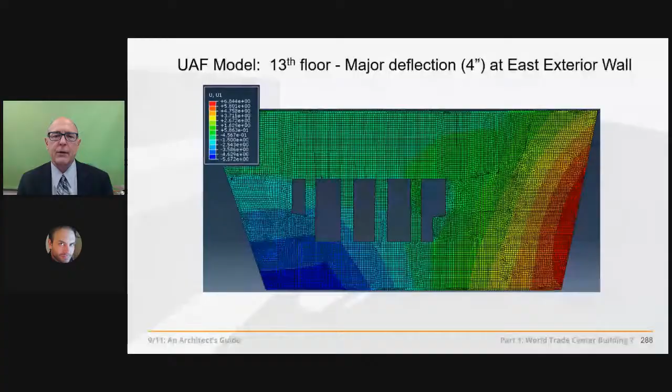And he concludes some remarkable things here, pointing out, first of all, that 30 shear studs were omitted by NIST, pointing out that steel stiffeners were omitted, as we discussed, pointing out that the 13th floor could not have damaged the 12th floor even if it did fall, pointing out that the exterior wall was not infinitely stiff as NIST claimed, meaning that the movement is out toward the exterior wall, not toward the inside where it's much stiffer.

So what are the key findings then? Approach 1: NIST overestimated the exterior wall rigidity. They found it was flexible. They found that the movement of girder A2001 was in the opposite direction.

They found through Abaqus in approach 2 that the shear connections on several beams that NIST says were broken could not have happened. They wouldn't have been broken. That the bolts fastening this girder to its seat wouldn't be broken either.

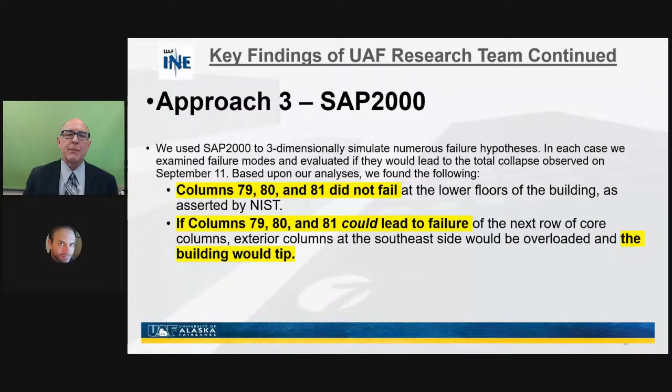So the essential findings are that fire could not have caused the collapse of Building 7. The temperature was not high enough to cause the weakening of the steel frame. Thermal expansion did not result in a loss of support for the beams and girders, and Building 7 did not experience that progressive collapse, but a global collapse caused by the near simultaneous failure of all of its columns.

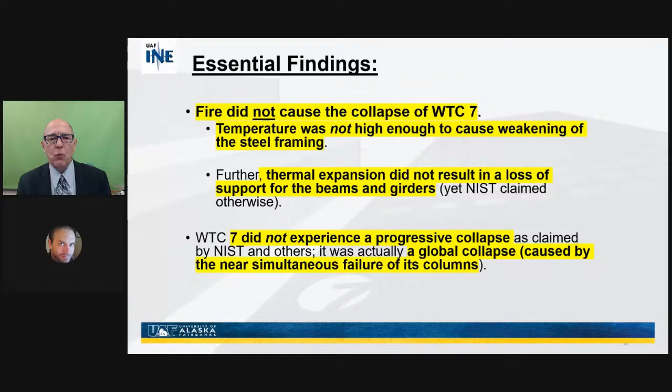So what we've concluded here is that we have support for the hypothesis of controlled demolition, especially when you consider additional circumstantial corroborative testimony, like foreknowledge of the destruction of this building, in which this anonymous engineer actually predicts the collapse is going to happen in 5 hours. I'm not kidding you. Chief Hayden says, if we allowed it to burn, how soon would we anticipate a collapse? The guy says, in its current state, you have about 5 hours.

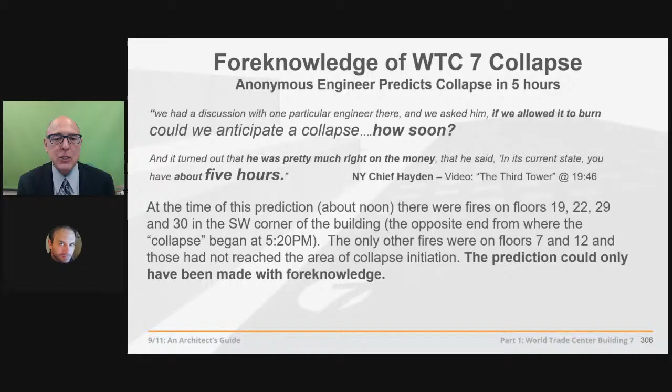So, an unprecedented event, the collapse of a steel frame building by fire alone. And the guy's actually saying it's going to take 5 hours. Hey, who is this engineer? We got to find out. They won't tell us. He's completely anonymous. Obviously, he had foreknowledge of when this building was going to come down, as did these construction workers who are walking away from Building 7.

They hear an explosion over their shoulder, look back, look straight into this CNN camera, and say this: you hear that? Keep your eye on that building. It'll be coming down. The building is about to blow up.

Moving back, all right guys. We are looking back, there's a building about to blow up. Blue flame, debris coming down. What? The building is about to blow up? Flame and debris coming down? How do they know the building is about to blow up?

No building that's been on fire has ever blown up and come down before. Here's Kevin McPadden, the Air Force medic who talked about explosions. Prior to that testimony, he and others are held back about 6 blocks away from Building 7 because they're told it's going to come down. They're told it had structural damage due to beams that hit it from the other building, even though that's not a cause of the official collapse according to NIST.

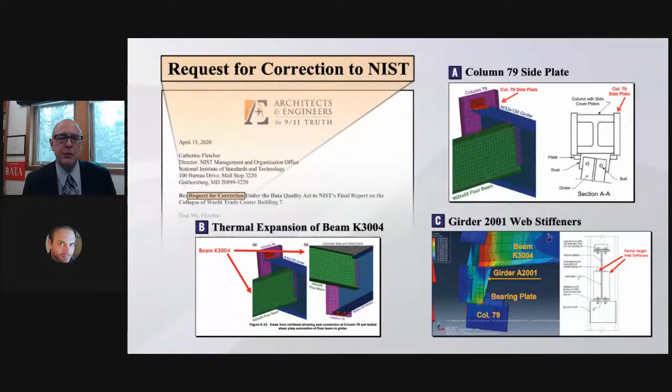50 to 100 hours of work went into this 100-page report, and now they have less than 3 months to respond—I think it's less than 2 months now. It's a very exciting opportunity for us, because we will sue them if they don't provide the response, and we don't expect them to provide it. But we will take them to task when they don't, and that's another reason we're going to Congress.

Andy, what are the opportunities here with the Bobby McIlvaine Act? Yes, this is the road to justice for the nearly 3,000 people who died on September 11th. That's what it's all about. It's named the Bobby McIlvaine World Trade Center Investigation Act, named after Bobby McIlvaine, who died in the North Tower on the morning of September 11th. He was killed by an explosion there. So by the very nature of how he died, we have an immediate conversation starter when we talk to our members of Congress about it.

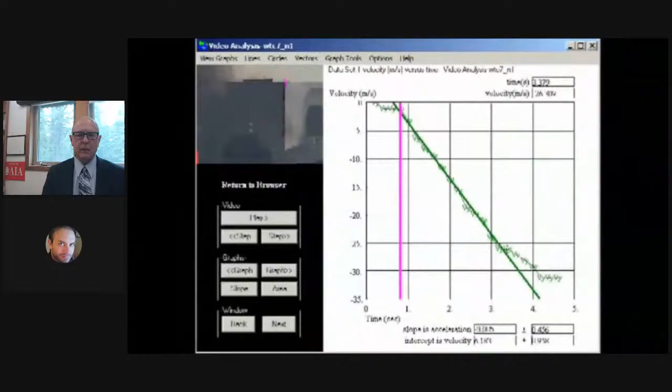They're talking about a single columnar collapse or failure that resulted in a total collapse of the building. Building number 7 descended in free fall for the first 100 feet, which means there was absolutely no resistance to the descent whatsoever. So all of the columns really needed to be severed at the same time. The symmetry is the smoking gun.

NIST has admitted it went into free fall for 8 stories. You don't need to be an engineer or an architect to see what happened to those buildings.

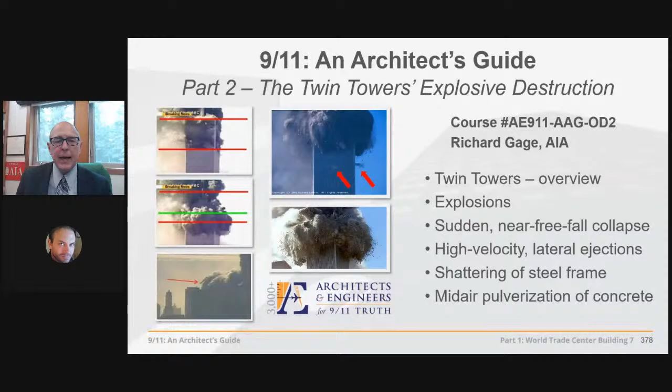And then the Thursday after that, we come back and look at the extreme heat in the towers with the high-rise fires, more details in the fires, more details in the pyroclastic expanding clouds of molten steel and iron microspheres, thermite, nanothermite, and a lot more detail than we were able to get into today. So that is it, and yes, that's going to be part 3 next week. So be sure to join us.